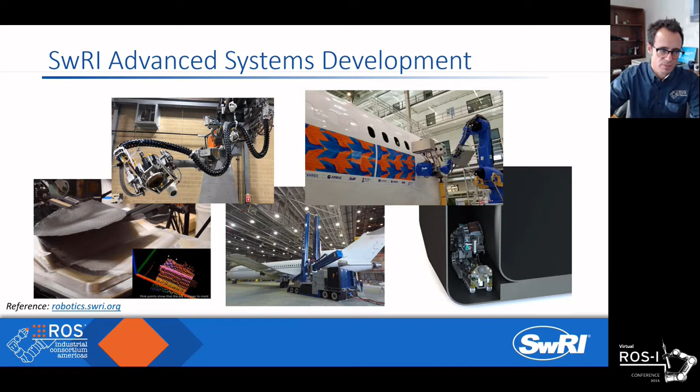We're doing handling of compliant materials, having to execute processes on very varying surfaces and dynamic environments, or of course navigating, inspecting, and traversing in very hazardous environments, all of which has led our group to get involved with ROS dating many years ago, and then seeking to understand if there was interest in developing open source capabilities for industry leveraging ROS, hence the ROS Industrial Open Source Project.

I don't have to necessarily, with this audience, define ROS, but typically when I'm in my legacy automation circles, they ask about ROS and how ROS Industrial is different. Largely, we're just trying to extend ROS into industrial relevant applications and industrial relevant hardware and interfaces, and bring along some tools that are very useful to enable industrial applications.

You may also know about the membership, but one thing - I'm not going to belabor that - but the point of a consortium is to provide direction. There's a lot of things we can do. What do we focus on?

Based on the workshops that we host, interaction with our members, the phone calls I get very late at night, these are the things we hear about, and the data points that we collect drive our vision to focus on these 4 pillars, where we're trying to get to the point of consistent quality, improved user experience, and of course the intelligent capability.

Obviously, in recent years we've seen a lot of work going on in human interface and interaction, one of those being a real explosion in augmented reality interaction with robotic systems. A lot of focus on interoperability - there was an AMR standard that's been pushed out here in the States not long ago. And of course you're going to hear more and more about the no-code revolution, which seeks ease of use. These are all things that we hear about.

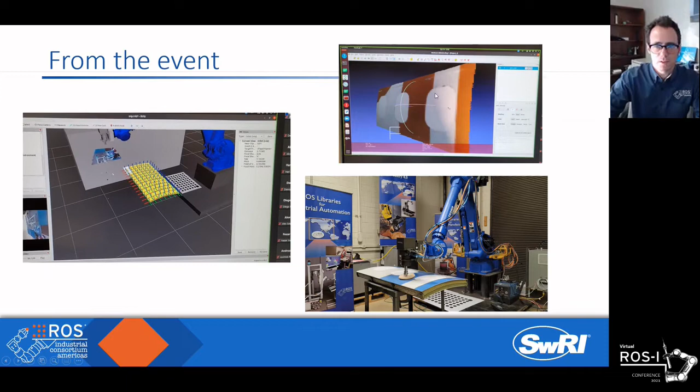On the left, we're doing some of the tool path planning that we step folks through to generate the raster path planning. We went through calibration, as well as the new Open3D based reconstruction for arbitrary parts. You can see it provides a colorized mesh. Overall, that was a lot of fun.

One of the biggest things we're seeing is basically a lot of ROS-II inquiries for support, a lot of that around porting services.

Or evaluations of something that the end user is familiar with in ROS-I, but they want to see if it works in ROS-II. So that's been a really interesting journey.

We get a lot of questions about whether we should consider going to ROS-II, and the answer is always a little more nuanced, depending on what kind of legacy code base there is, as well as what they're seeking to do and their time horizon for implementation and life after implementation. That always drives the discussion.

One of the big things we've been doing to support our membership and end users is basically testing performance. There's a lot of questions like, hey, we need it to perform as such, whatever the metrics are—is it pick time, is it motion planning? What is the performance difference between how we did this in ROS-I versus ROS-II?

The other thing that's really emerged as a popular element is deploying over different OSs. For a long time, when you get into the industrial realm inside the four walls of the factory, there's not a lot of interest by supporting IT organizations in supporting Ubuntu. There's been some movement in this with some contemporary organizations being more open to it, but some of our legacy large end users still have challenges with putting networked Ubuntu boxes on their factory floor.

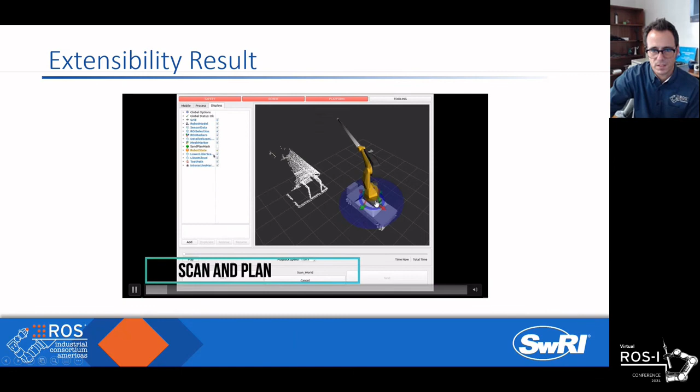We had the recent opportunity to take what we're doing for sanding on aircraft and some inspection, and do something totally different on a different hardware platform. This is the video. We had about 6 months to basically port or set A5 up on this FANUC robot with a different omnidirectional base in an interesting painting application.

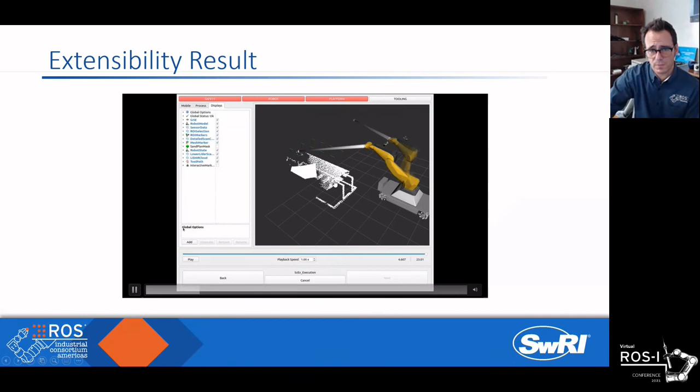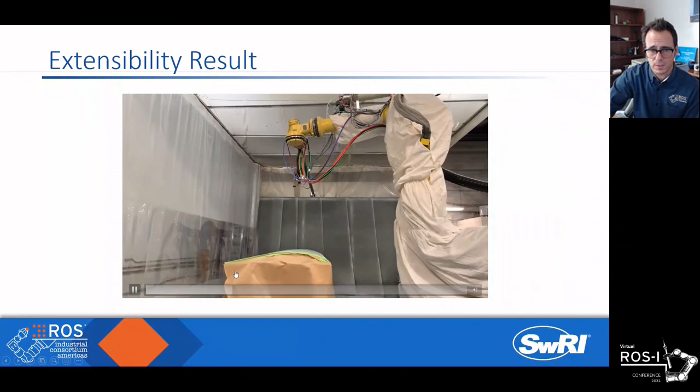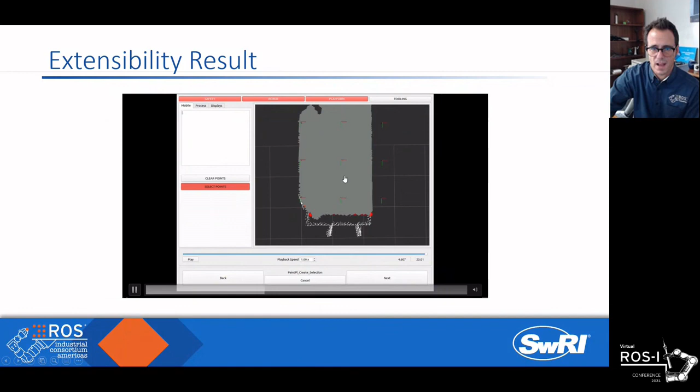For those familiar with A5, it's basically a big scan and plan implementation. In this case, there's a presented part, we do a coarse scan, pick something out of the coarse scan, then do detailed scanning, which is happening now. It's even the same sensor, the IFM. Then we do detailed raster path planning to support the process of interest, in this case aerospace painting. You can see the tool paths, and eventually it's painting.

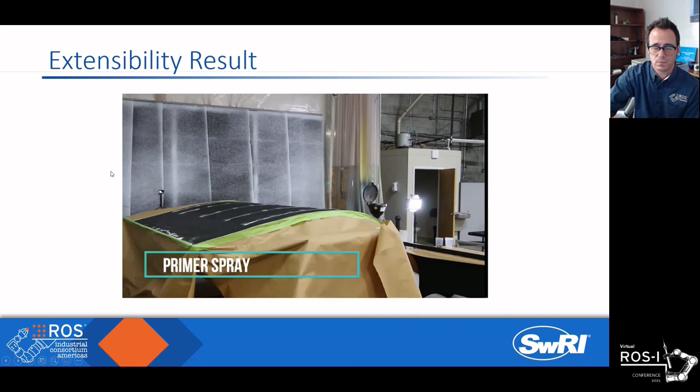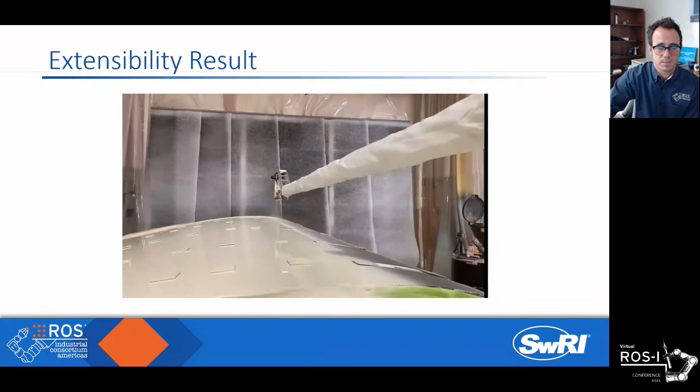I just wanted to highlight that. We talk about the vision of ROS Industrial as providing foundational modules and building blocks to build new applications, and this is where the rubber really hits the road, taking something that we have out there. A lot of these core repositories are ROS agnostic, nothing preventing this from being a ROS-II application as well. I just wanted to touch on this recent success story.